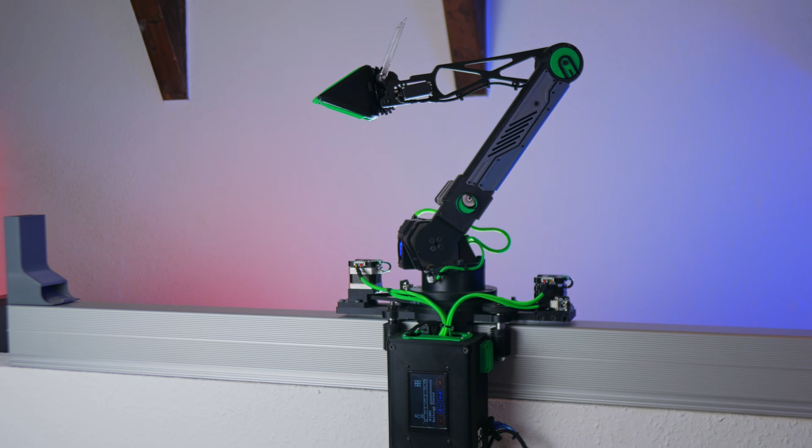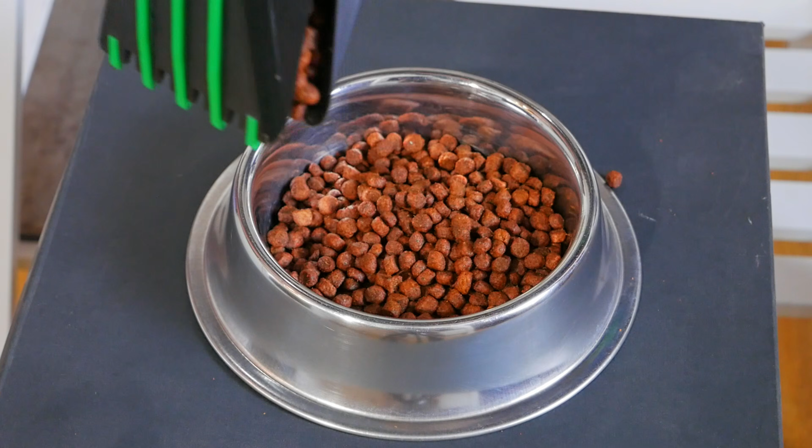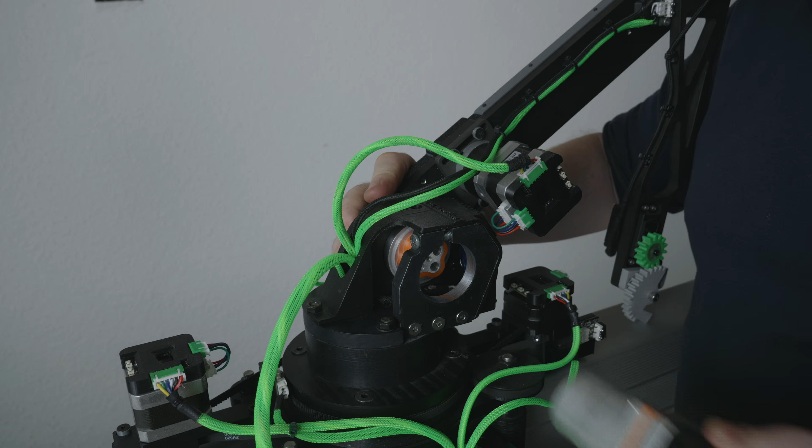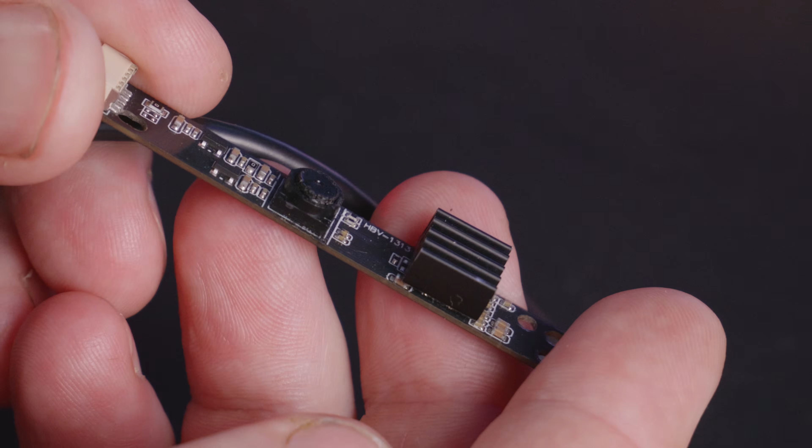A while ago I built this robot, and many of its parts come from old 3D printers. At first it was mostly just a fun project, basically an overly complicated dog feeder. But working alone on projects all the time gave me another idea. What if the robot could become my camera operator? To make that possible, I upgraded the main shoulder joint to a harmonic drive for smoother and more precise movement. And so the robot could follow me automatically, I added AI tracking. And to complete the system, I needed to integrate both cameras, the AI camera and the main camera, into one unified design. But before we can start, the old gripper has to go.

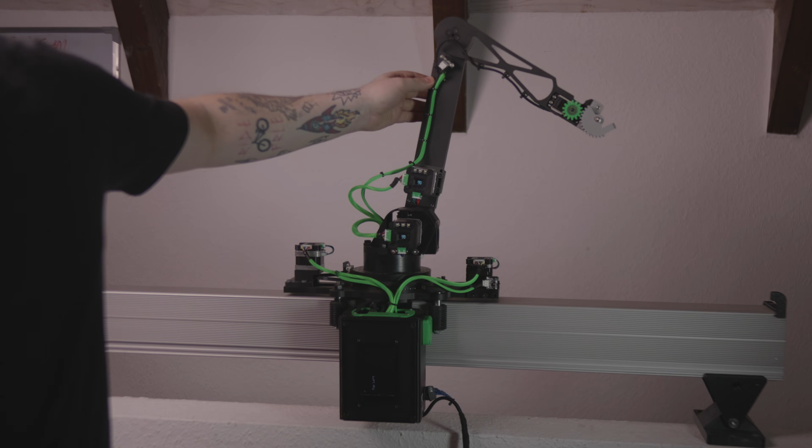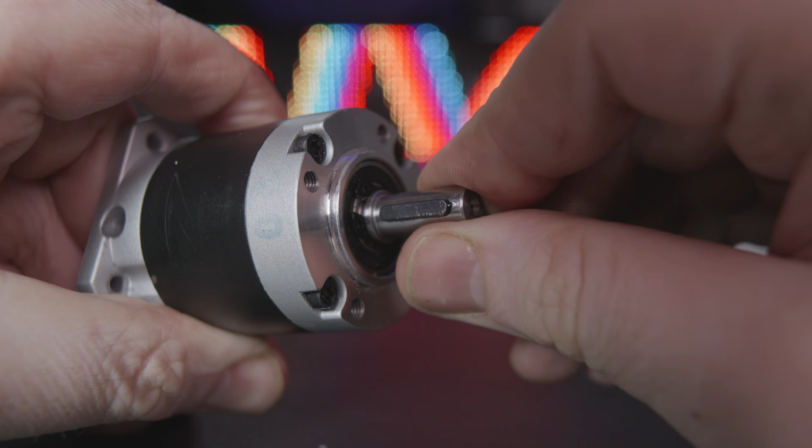So let's start by fixing one of the biggest problems, the backlash in the main shoulder joint. One thing you can clearly see here is the play in the main shoulder joint. I'm using a planetary gearbox with a 100:1 reduction. Because of the long arm, even a small amount of play gets amplified. When I move the robot past a certain point, the arm drops forward or backward. The reason for this is backlash in the gearbox. To show that simply, here's a small gear model. When one gear turns, there's a short delay before the other one starts moving. That's backlash, and in this robot it's clearly visible. So the planetary gearbox has to go.

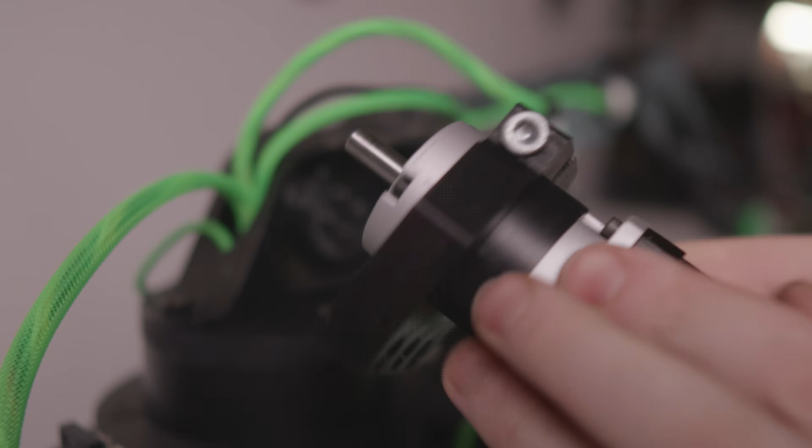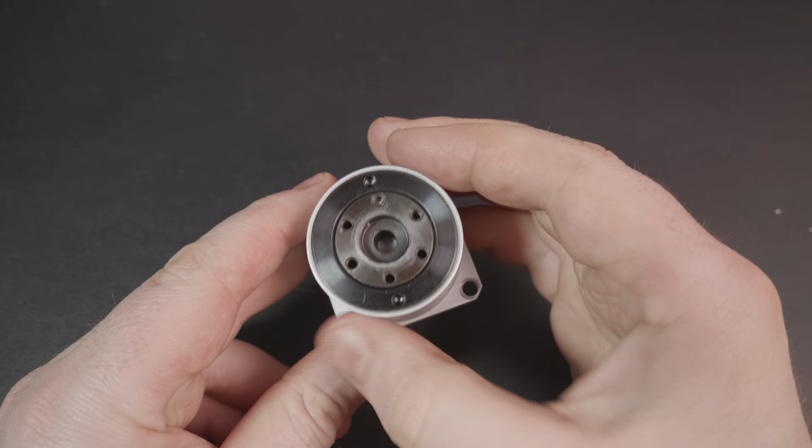To fix that problem, I'm switching to a harmonic drive. I picked this one up fairly cheap on AliExpress. It shipped by sea, so delivery took a bit longer. As you can see, it's actually quite small, even smaller than the planetary gearbox. The key difference is backlash, and a harmonic drive essentially has none. And the reason for that is this flexible gear.

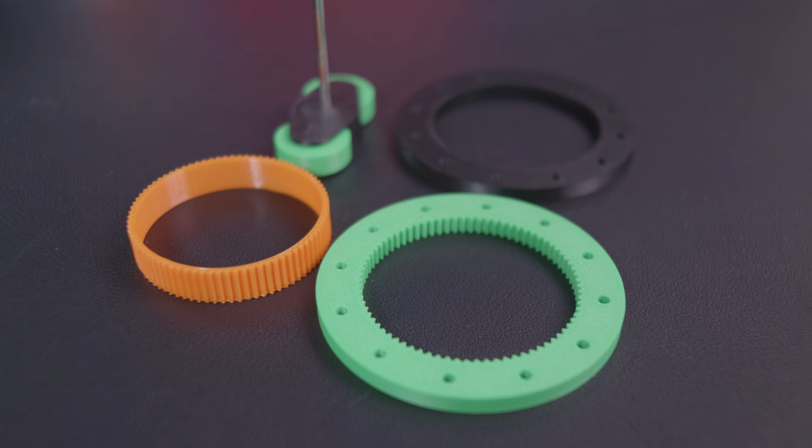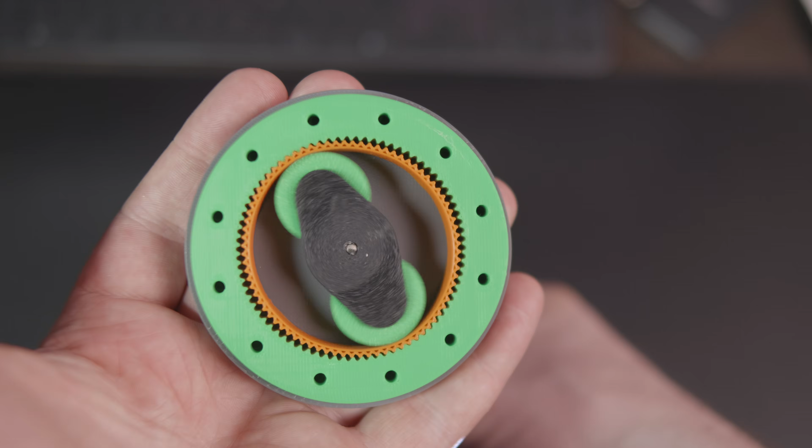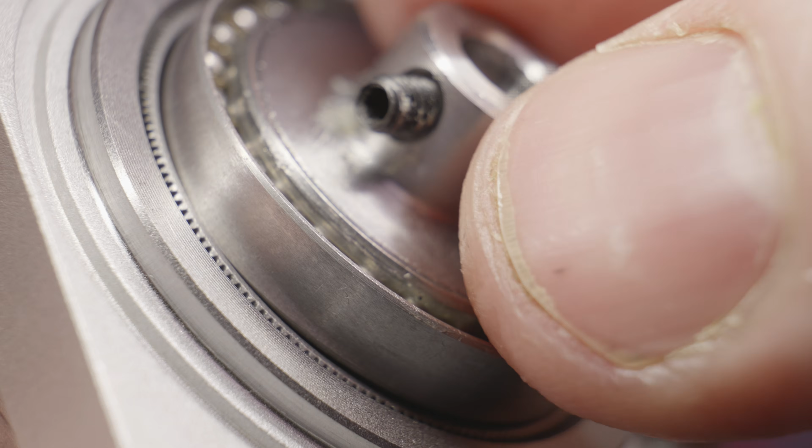To show what's happening inside, I printed this open harmonic drive model. The main components here are the flex spline, the wave generator and the circular spline. The wave generator deforms the flex spline, keeping the teeth in constant contact. That constant contact creates a permanent load on the contact surfaces, even during load changes. In this model, the flex spline is made from soft plastic. In a real harmonic drive, it's made from spring steel, allowing it to flex elastically under load.

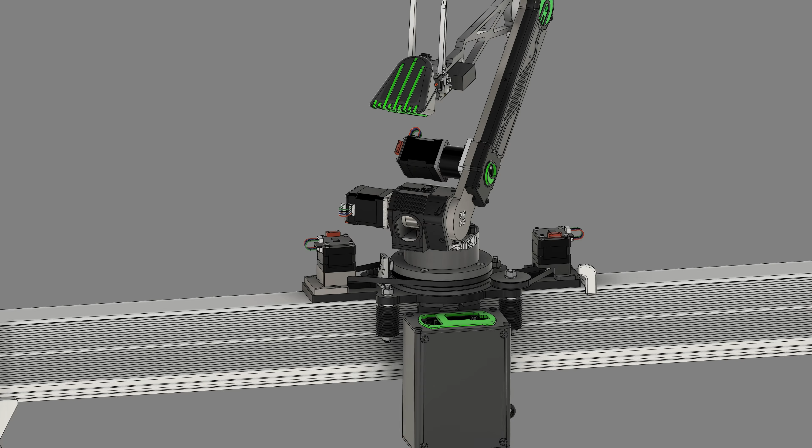Now, the question is, how do I connect the harmonic drive to the shoulder arm? The harmonic drive doesn't have a shaft, it only has a flat mounting face. That means I need a completely new coupling. You could probably buy something off the shelf. But instead, I designed a custom solution in CAD. To connect the harmonic drive to the shoulder joint without any backlash, I designed a 3-part coupling that locks together in a form-fitting way. It consists of a male hub and a female hub, with a flex insert in between.

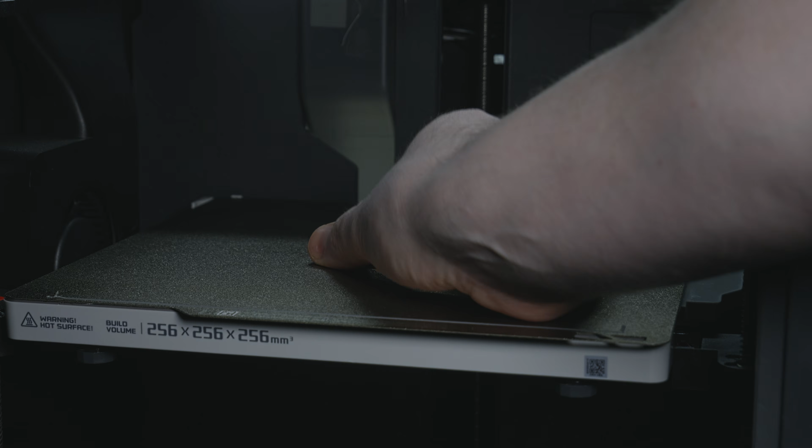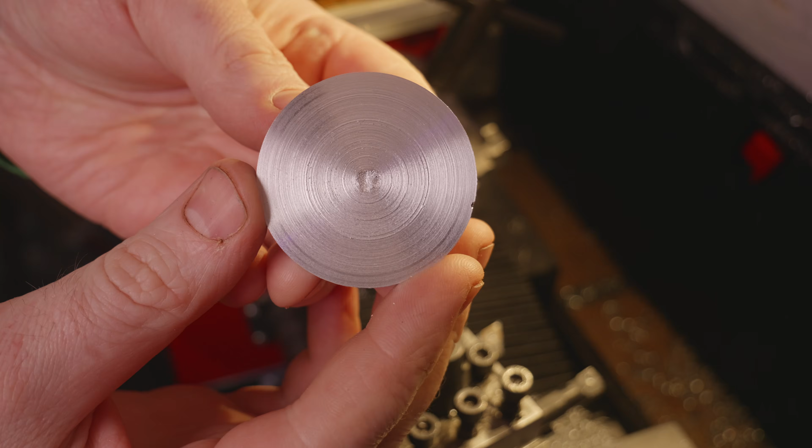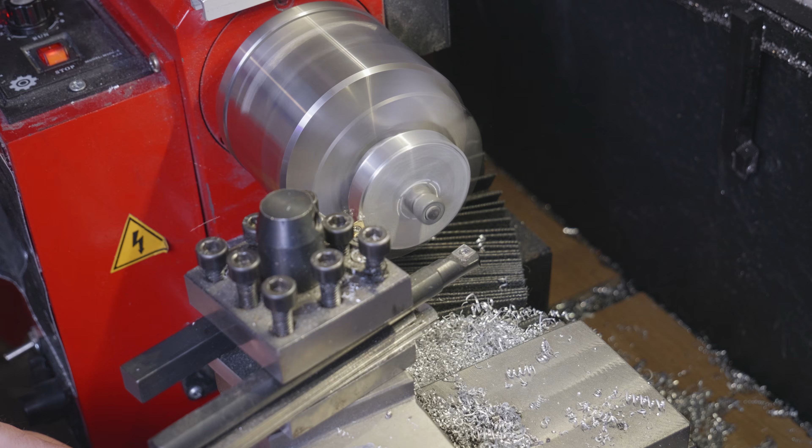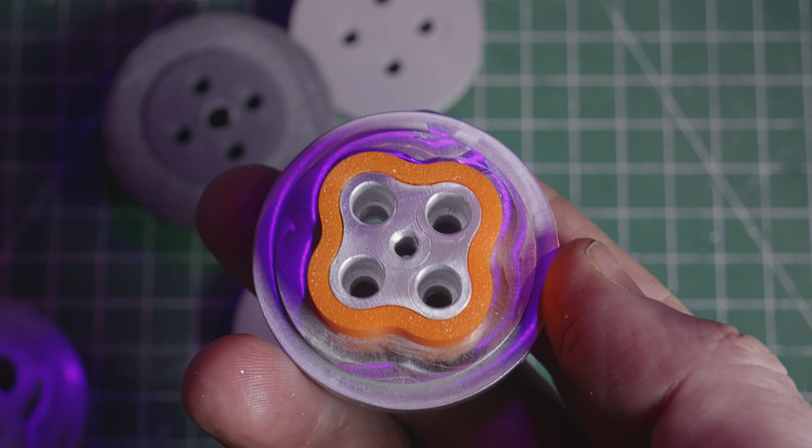On my first attempt to bring this design to life, I 3D printed the parts to create a sand mold and poured molten aluminium into it. But the results weren't precise enough for this kind of part. So instead I machined both parts on my CNC and finished them on the lathe. I have to admit, it didn't work perfectly right away. I went through a few iterations and had to remake the parts more than once to get the fit just right. What really mattered was a precise form fit with just enough flexibility through the flex insert.

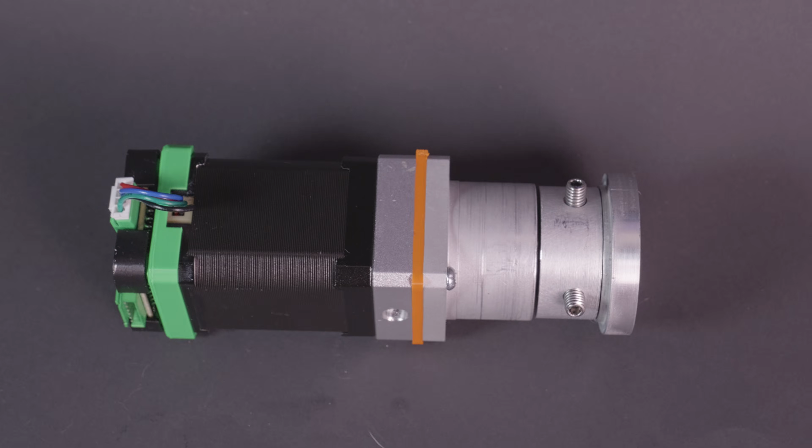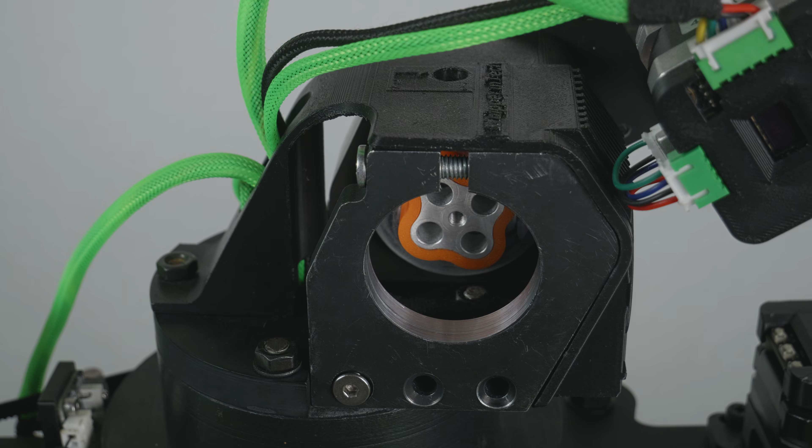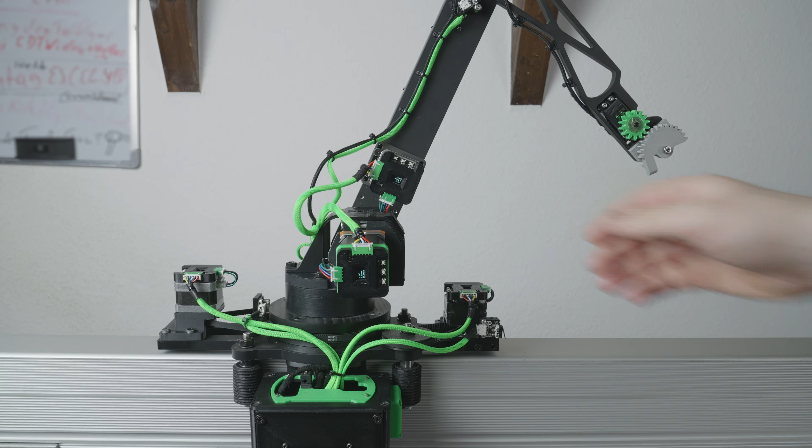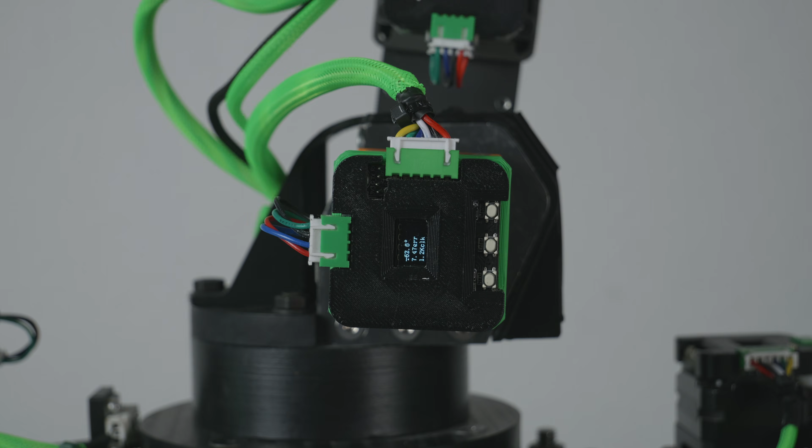Alright, let's put everything back together and see how the new gearbox and coupling perform. Before we start, the motor driver needs to be calibrated, so the FOC controller knows the exact position of the motor. And right away, something feels different. When I move the arm by hand, there's basically no play left, and when I drive the robot, it just holds its position. It doesn't drop anymore past a certain point, like it did before. The motion is incredibly clean now.

And just for comparison, this is how it looks with the old planetary gearbox. Backlash everywhere.

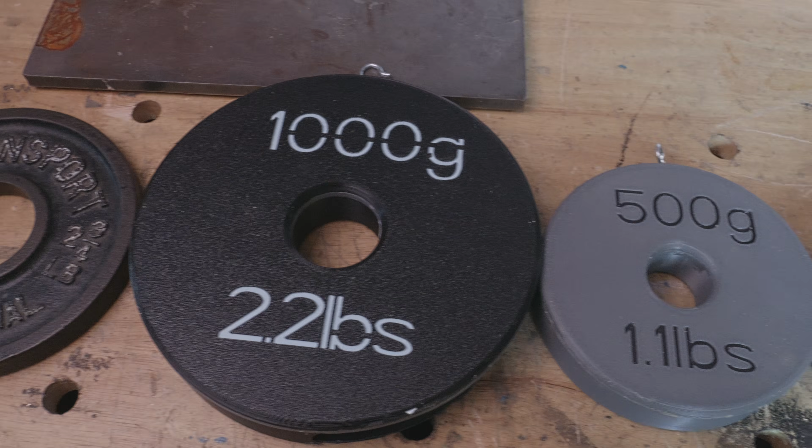To figure out which camera we can actually use, we first need to know how much weight the new gearbox can handle. To find out, I'm going to push the system step by step, starting with 500 grams. At first, everything works exactly as expected.

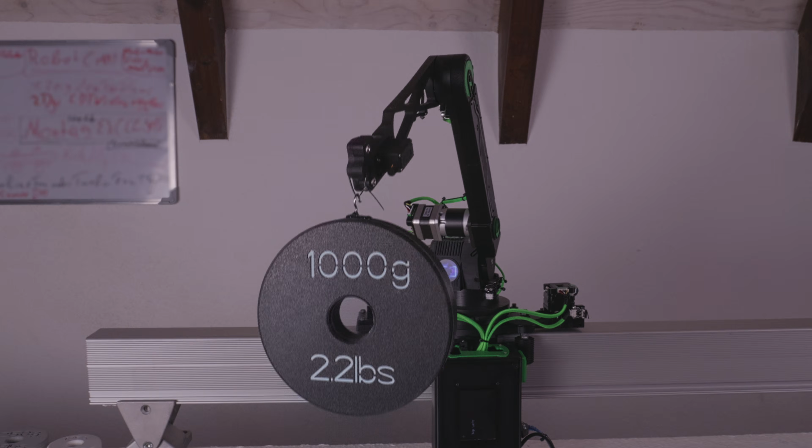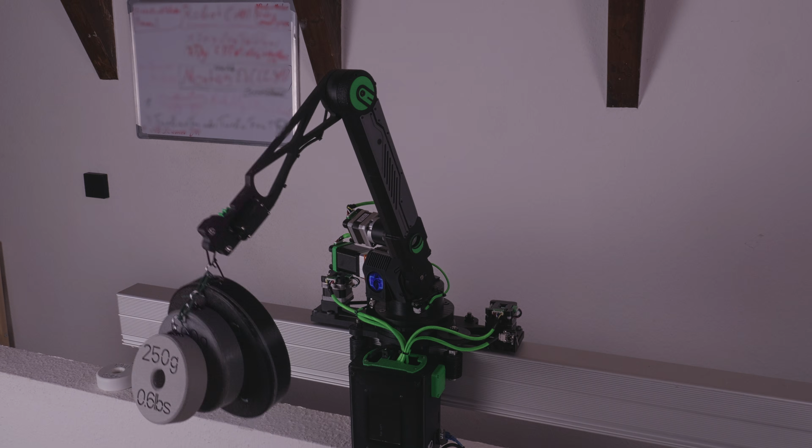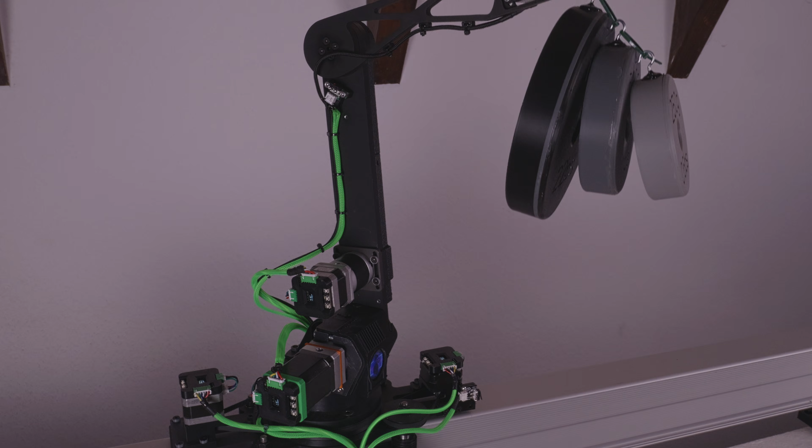Even at 1 kilogram, the arm still moves smoothly, both in the shoulder and the elbow. And even at 1.5 kilograms, it's still surprisingly solid. But as the weight increases further, at around 1.75 kilograms, the elbow joints start to give in. Basic movement and rotation are still possible. But lifting becomes unreliable, and when the stepper tries to compensate, it doesn't end well.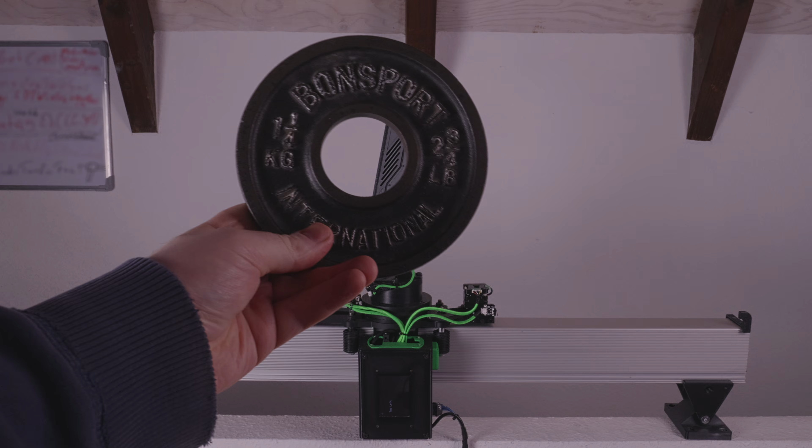So, that gives us a pretty clear limit. At around 1.25 kilograms, the system is still stable and reliable, with a bit of margin left.

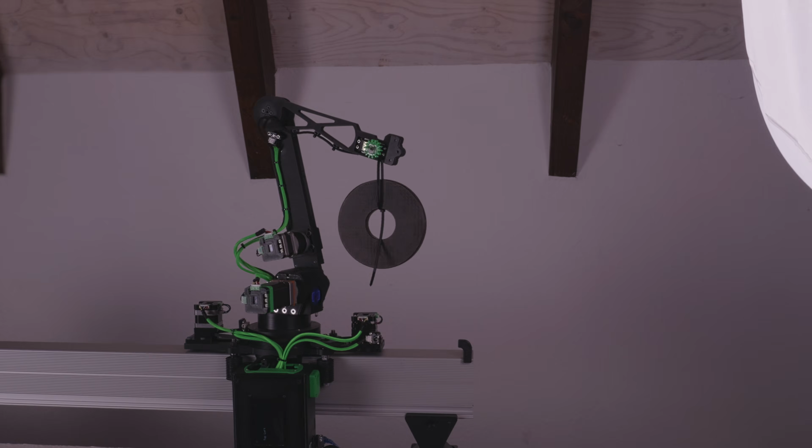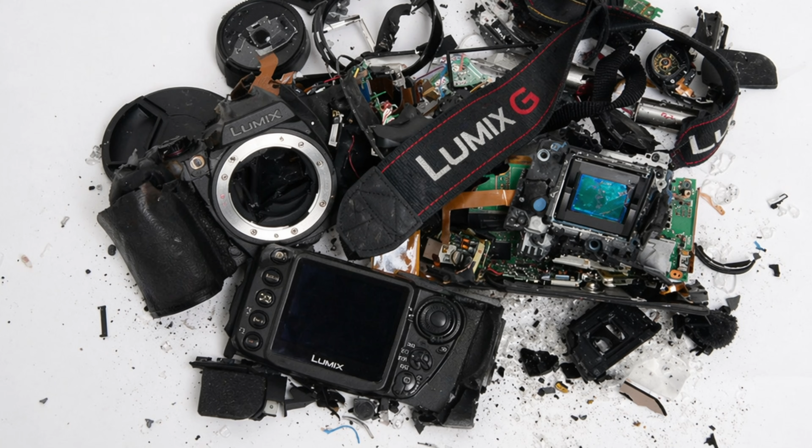Now that we know what the arm can handle, we can choose a camera. Ideally, I'd go with the Lumix GH7, but at around 1.8 kilograms total weight, you can probably guess how that would end. So instead, I go with the lightest option available, the Sony QX10. At just 130 grams, it's extremely lightweight, and honestly, it just fits the robot perfectly.

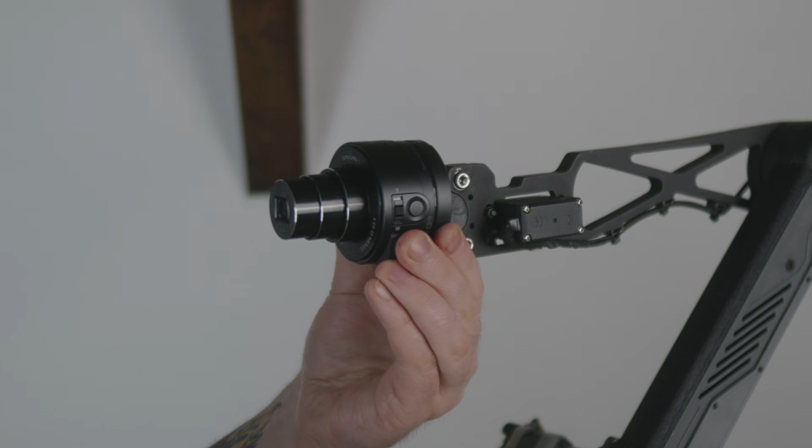In order for the robot to follow me like a cameraman, it first needs to learn something very fundamental: it needs to be able to see. For that, I'm using a simple USB camera connected to my Mac Mini, running an AI model called YOLO that processes the camera image in real time and detects what's inside the frame: people, objects, movement.

But for the robot to follow me, that alone isn't enough. It needs to understand my position inside the frame, and more importantly, how far I am from the center. So I take the detected person and calculate a single point right in the middle. That point becomes our reference.

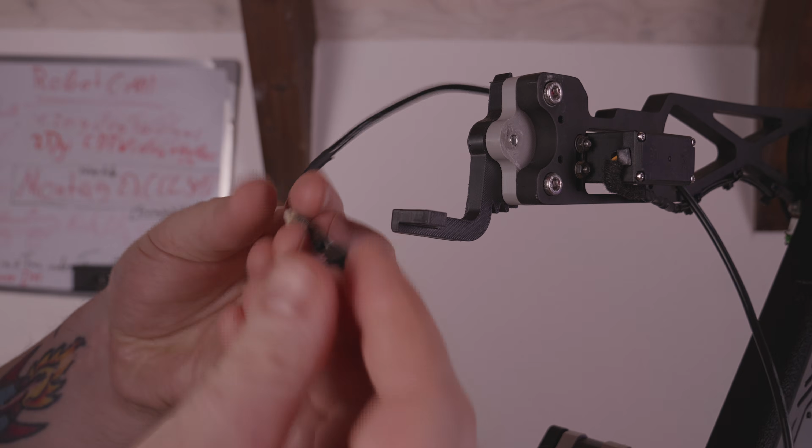As soon as it's no longer centered, the code calculates the offset, how far I've moved, left, right, up or down. With this information, the robot can follow me, not because I told it where to go, but because it sees me. For the first time, it's not just moving, it's reacting to what it sees.

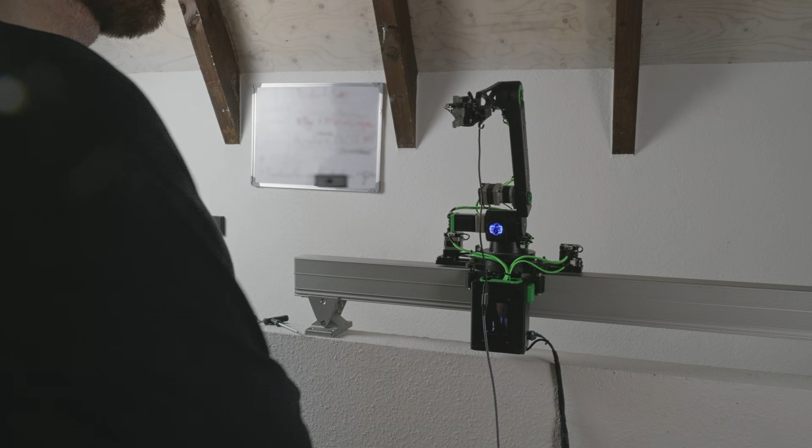So now it's time to install the main camera and properly integrate the AI system into the robot.

So why did I choose this camera? From a technical standpoint, it's honestly nothing special. It's over 10 years old, has a tiny sensor and only shoots up to 1080p, and you control it with a smartphone. So yeah, by today's standards, it's basically a toy.

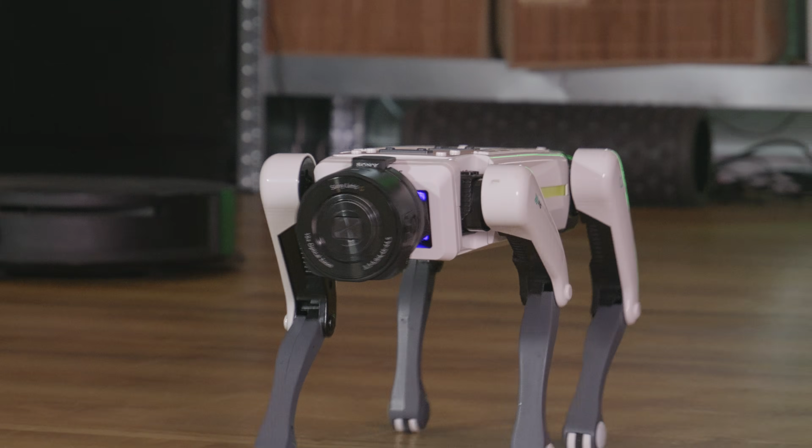But it has a 10 times optical zoom, and more importantly, just look at it. Mounted on a robot, and it stops being a camera, it becomes a character. But will the image quality be good enough? We find out later.

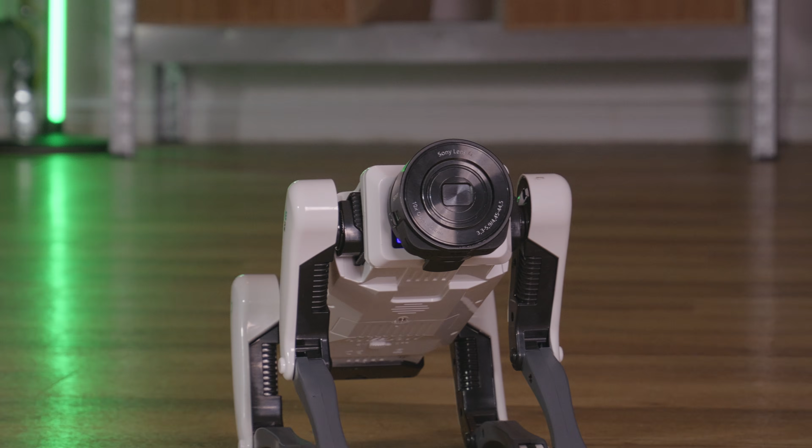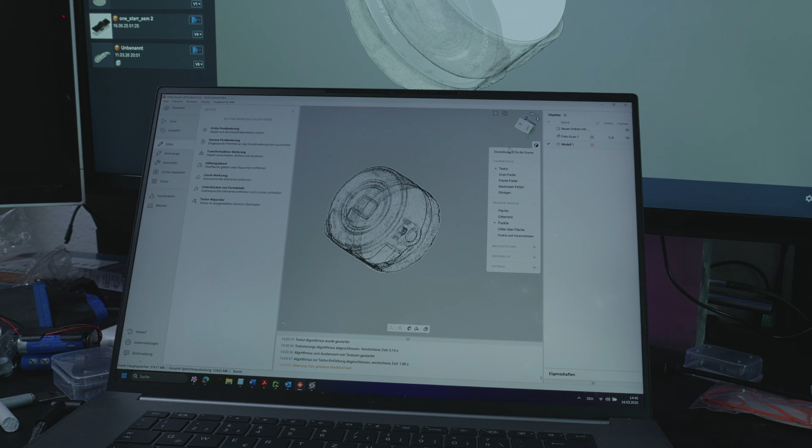To properly plan the camera integration, I first need a 3D scan. For that I'm using photogrammetry. I start by applying a matte coating to the surface, a slightly risky move. Then I take around 50 photos from different angles and reconstruct the camera in software like Artec Studio. With a bit of cleanup, I end up with a highly detailed 3D model, and that's what I bring into CAD.

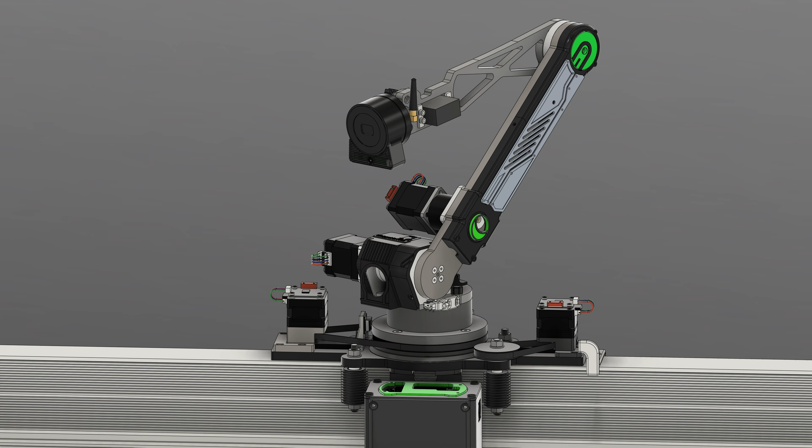The goal for this mount was to combine the AI camera and the Sony camera into a single futuristic housing, without interfering with the robot's kinematics. It might not look like much, but this took way longer than I like to admit.

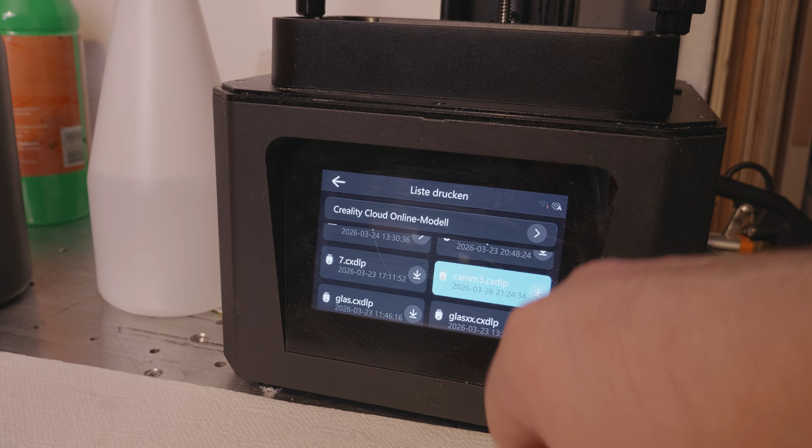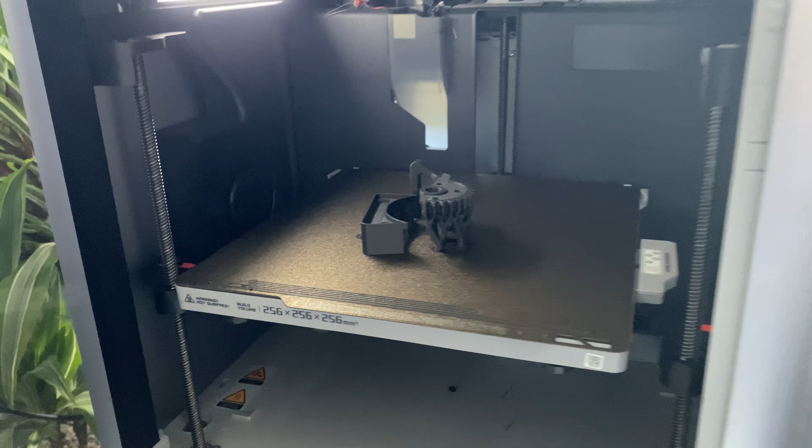This time I'm printing the mounting parts in resin, hoping for a more premium finish. To give them a cleaner look, I decided to sandblast the parts. I never tried this before, but the result actually looks pretty interesting. I also printed the mount in FDM, just to have both options. And honestly, I kind of like them both, which only makes the decision harder.

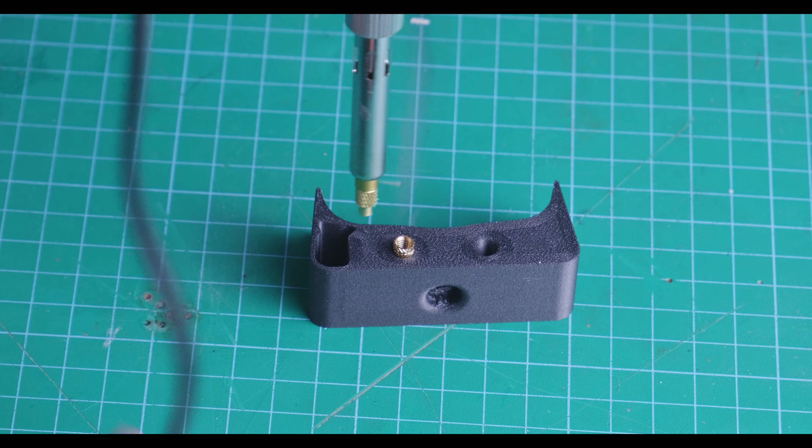To assemble everything, I'm using threaded inserts, finally with the proper tool this time. Before, I was just using a soldering iron tip. To keep the camera head moving smoothly, I press in the ball bearing, which should make the motion a lot cleaner.

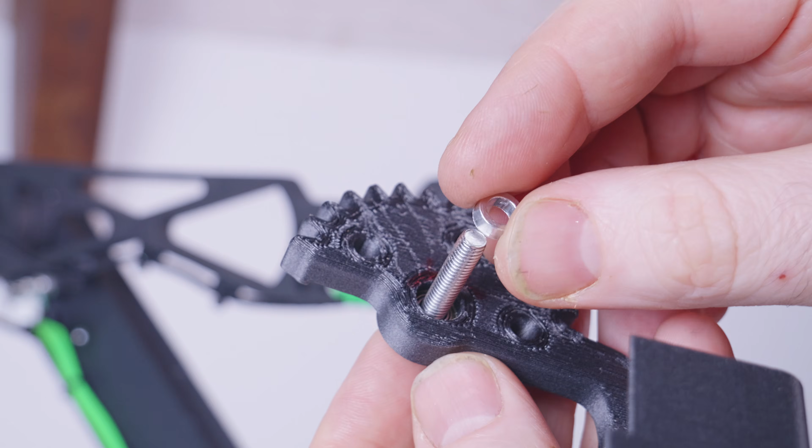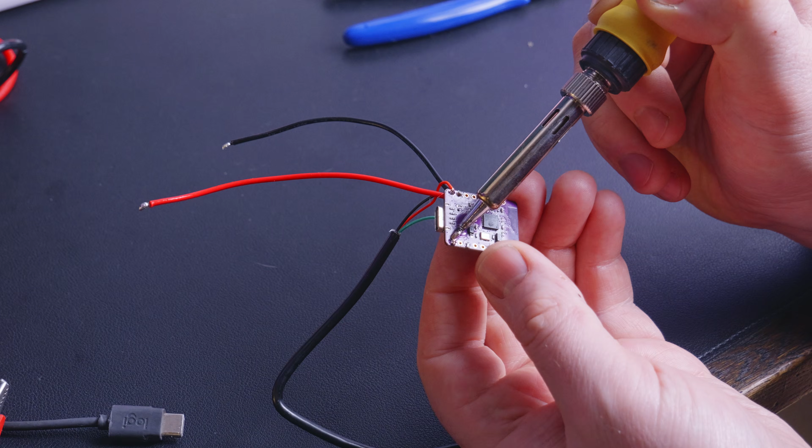Honestly, I'm a bit surprised myself how well the camera fits into the mount. I also prepared a small ESP32, just to drive a simple status LED. Maybe a bit overkill for a single LED, but I thought it fits the project quite well. And for some extra style points, I added a small Wi-Fi antenna. It doesn't really serve a purpose, I just like the sci-fi look.

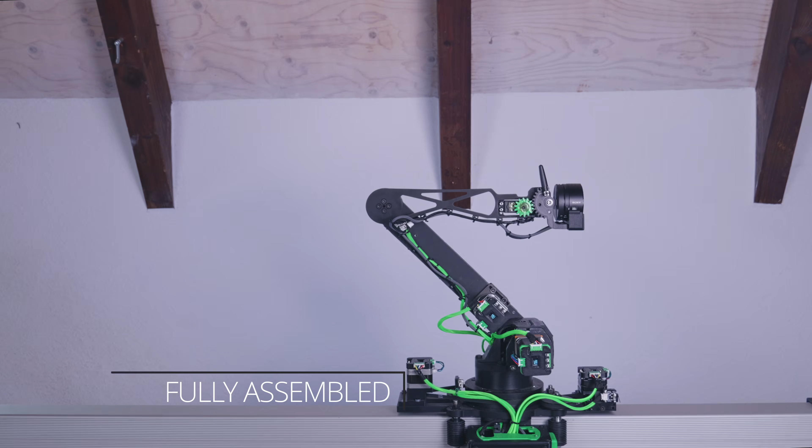And just like that, it's finally finished. Now I just want to see what kind of shots I can get out of it. For the first test, I want to program a camera move around this object.

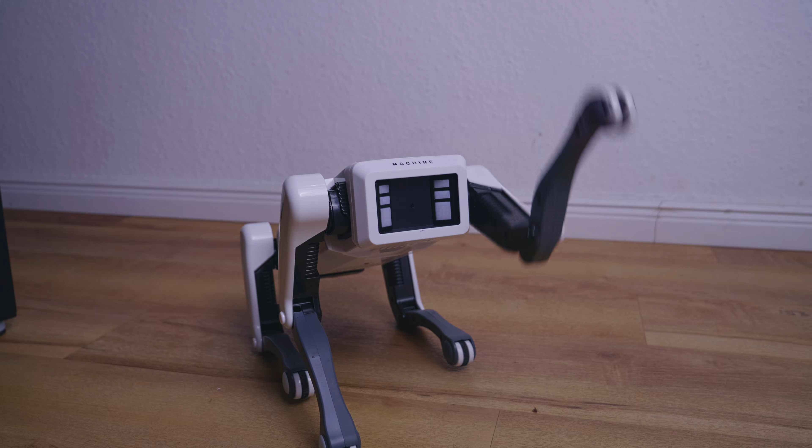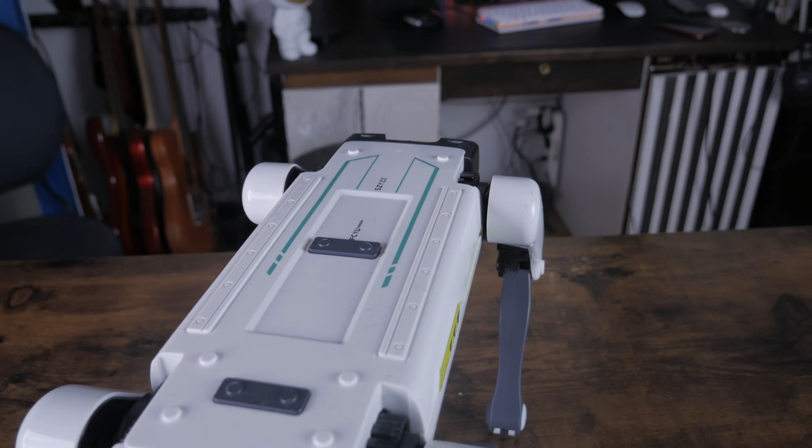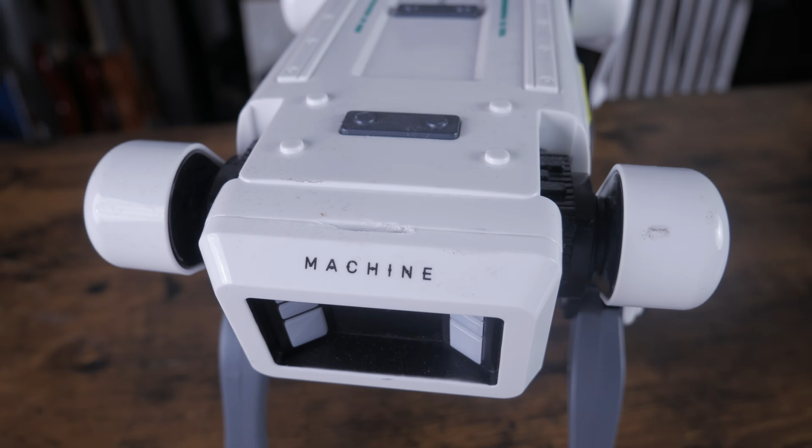This camera move was programmed beforehand by manually moving the robot to different coordinate points and saving each position. To make that possible, I wrote a small tool that lets me record and replay the movement. As you can probably tell, there's still a lot of room for improvement. But hey, it works. And after that, I see how well the AI tracking can keep up.

My expectations aren't exactly high right now. I mean, the camera is over 14 years old. So let's just see what it does.

As you can see here, the AI detects me and places a tracking box around my body. Using that information, the robot can now follow me through the room on two different axes: one rotational axis and one linear movement axis. I mean, the footage doesn't exactly look impressive, but honestly, it works a lot better than I expected.

So I'm really happy to finally be done with this project, even though there are still a lot of things I would improve in the future. But it's time to move on to new projects.